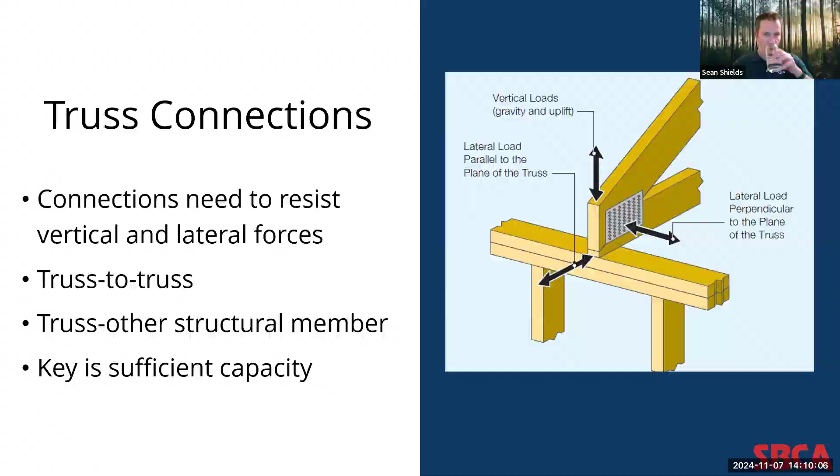Now, regardless of the connection type used, they must be reviewed and approved by the appropriate party to ensure that they have sufficient capacity to transfer the required loads. And this is because the type and magnitude of the load being resisted will be influenced by several things, including the location of the connection point in the structure, certain framing conditions, and the type of environmental loads that will be placed on the structure over the life of the building itself.

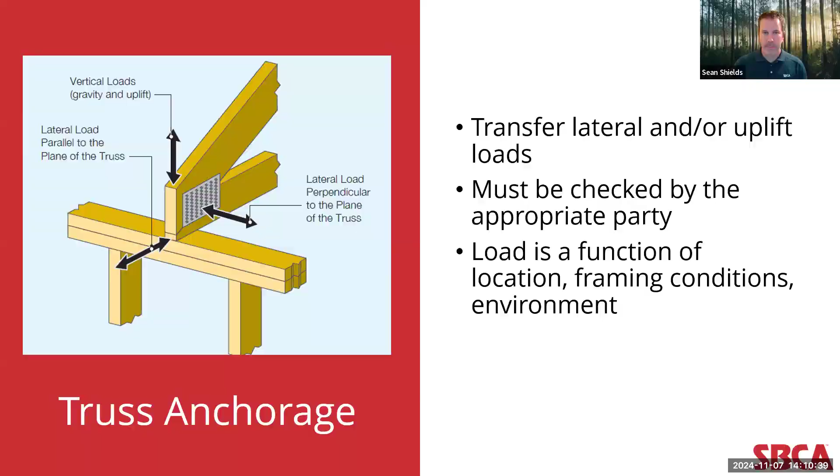So let's quickly go over some of the loading conditions that we covered in part 1 that impact truss design, and also the design of the truss connections. So whether it's a truss anchorage point or a truss-to-truss connection, these different loading conditions help determine proper connections. So vertical forces on the roof system are resisted by the roof trusses. That's then transferred to bearing locations, which are resolved then within the structure itself.

Again, following established scopes of work when it comes to determining or reviewing truss anchorage and/or truss-to-truss connections is pretty important, because the truss designer is really only responsible for designing individual trusses, independent of the roof system or other structural systems in play. And I'll repeat that. Again, one way to think about it is the truss designer is really designing a 2D element within the 3D structure. They're designing a single element and designing it to resist the loads that have been identified by the building designer.

And I keep on using the word building designer, and depending on whether or not you are in a building that's governed by the International Building Code, which does require a registered design professional to be the building designer, and we'll talk a little bit more about that in a bit under scopes of work, or you're under the International Residential Code, where that building designer may or may not be well defined. It may be just the building owner or someone that the building owner has contracted to review construction documents and prepare them.

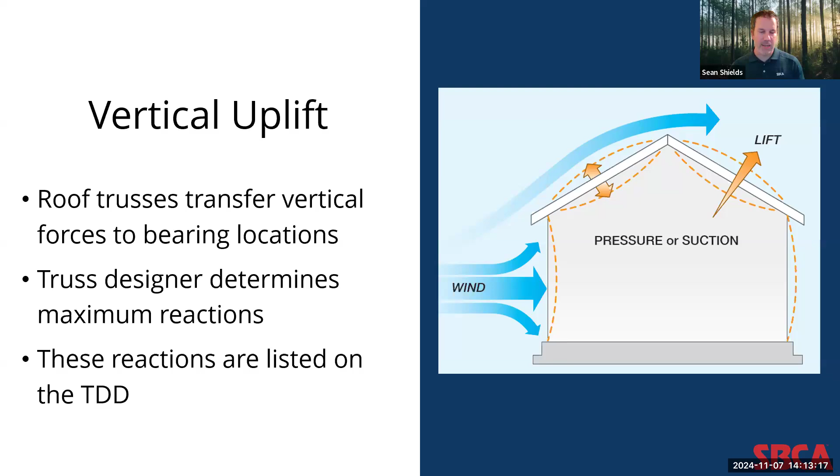The truss designer will take the information provided in the construction documents. They'll analyze the multiple load combinations provided in the construction documents, and then determine the maximum reactions at the support locations from the loads applied to an individual truss. Now, these maximum reactions are then provided in the individual truss design drawings. And again, the building designer or building owner needs to review them to ensure they don't exceed expected load conditions. So we'll revisit that concept a couple of different times in a couple of different ways.

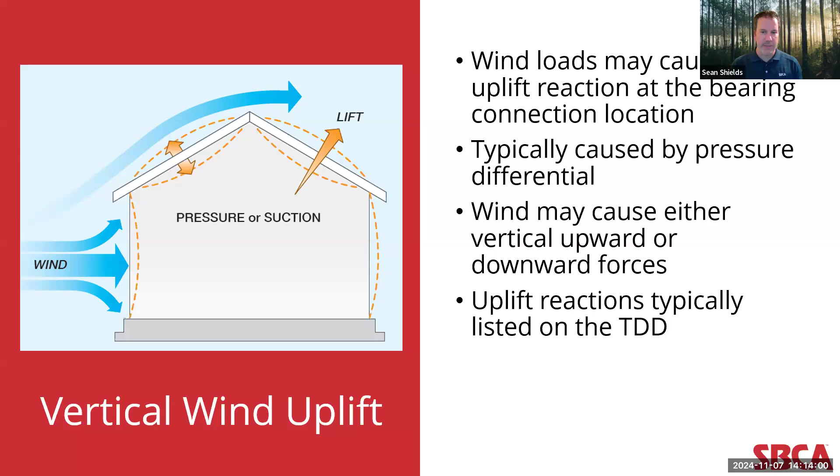So let's look at two load examples, wind and gravity. Now, depending on the roof shape, the span, configuration, wind loads applied to a roof structure may cause an uplift reaction at the truss-bearing connection locations. Now, this is caused typically by pressure differential created when wind blows over a structure. As you can see in the figure on the left, wind loads applied to a structure result in either upward or downward vertical forces. Again, the magnitude of these uplift reactions will typically be provided on the truss design drawings and need to be reviewed by the building designer or designated person by the building owner.

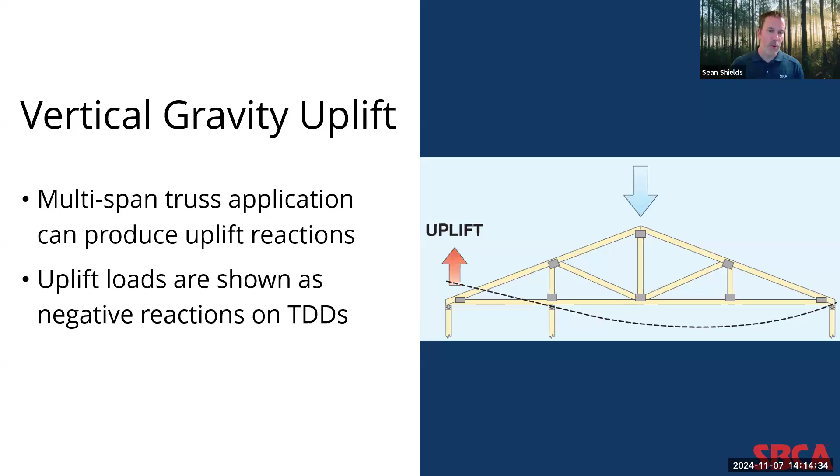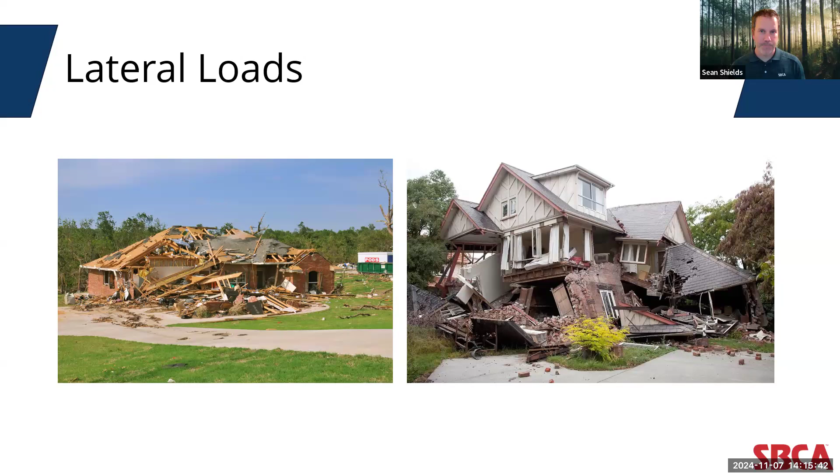Given all this, a complete understanding and analysis of all the code required loads applied is vitally important, and again, a responsibility of the building designer or the building owner. The magnitude and location of lateral loads applied to a structure are dependent on many variables, including the location of braced wall lines, wall heights, anything like that. Again, the truss designer is only responsible for the design of the individual trusses and applying the loads specified in the construction documents. Otherwise, if a piece of information is missing, they have to start submitting a bunch of requests for information. And depending on how well those are replied to, it can really slow down the process or increase the cost of the design.

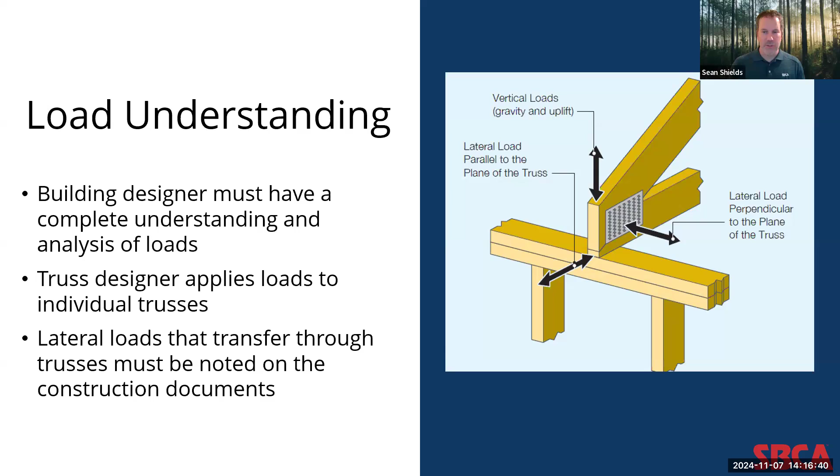Any lateral loads that are applied to the side of the structure or elsewhere that transfer through individual truss members need to be noted in the construction documents so that the truss designer includes them in their analysis. So how does this impact truss-to-truss connections? In light frame construction, it's common to design and integrate a girder truss, for example, which is a carrying member to support other trusses or groups of trusses. Truss-to-truss or truss-to-girder truss connections are under the scope of work of the truss designer. Per the ANSI TPI 1 standard, connection information must be included on the truss design drawings for any truss-to-truss connections.

For those of you who might not be familiar, the ANSI TPI 1 standard is sort of the governing standard for the component manufacturing industry. The TPI stands for the Truss Plate Institute. The TPI 1 was first issued in 1961 and is updated on a pretty regular basis through a consensus ANSI standard-based revision process. And TPI 1 includes a lot of information that governs both how the metal plates are manufactured and designed, but also how components are manufactured in a facility to how quality control is conducted. And again, that TPI 1 standard requires certain information to be included on the truss design drawings, including truss-to-truss connections.

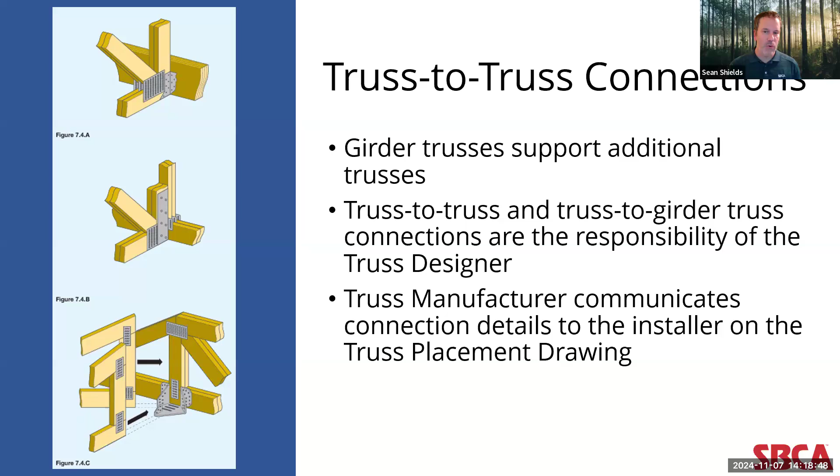It's important to note that most of today's truss design software has the capability to analyze and identify the hanger or other connection that would be sufficient to transfer the gravity or uplift reaction loads that are calculated from the supported truss to the girder truss. So again, the truss designer is responsible for providing that information, and a lot of times they're going to be using their design software to calculate what those reaction loads are, and then specifying the particular hanger or connection needed to handle those reaction loads. When the truss manufacturer uses this capability in their software, typically the required hanger or connection device will be specified on the truss design drawing for either the supported truss or the girder truss.

Examples of some of the manufactured metal hangers used in these applications are shown here on the left. And while truss-to-truss and truss-to-girder connections are listed on individual truss design drawings, many times it can be easy for this critical information to be overlooked or misunderstood by installers. To overcome that, often this connection information, including manufactured metal hanger callouts, is also included on the truss placement drawing itself, which is one of those primary documents that installers are usually holding on to see where individual truss elements are placed. We'll talk a little bit more about the truss placement drawing in a couple of minutes, because even though this important building design information is included on it, there are sometimes some misunderstandings of what the truss placement drawing is. But again, we'll get into that in just a few minutes.

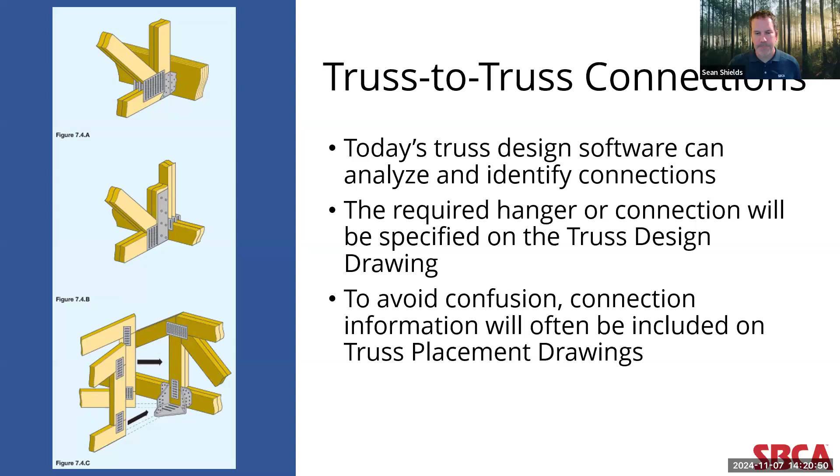Typically, toe nailing is sufficient. And that's because these are typically very short spans and have very light end reactions associated with them. Truss applications make toe nailing an efficient and effective attachment method in most cases. When the installer is toe nailing, those connections typically adhere to prescriptive tables provided by the code or other design documentation.

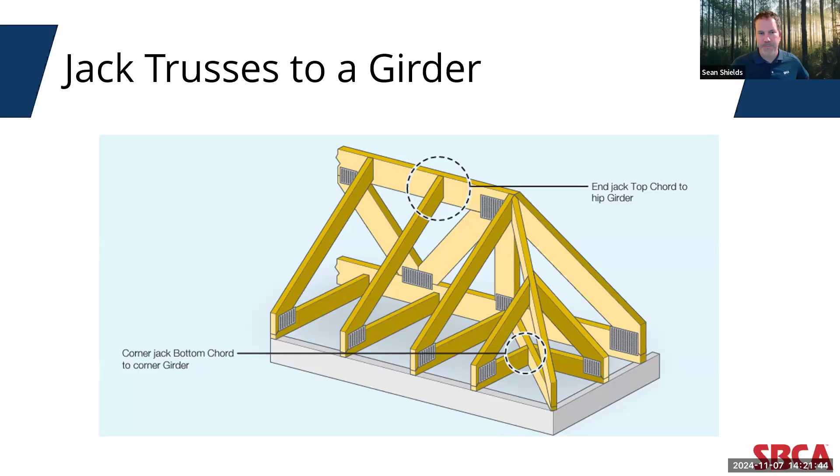Now, multi-ply trusses are another kind of truss-to-truss connection that we have to worry about. Multi-ply trusses are trusses designed to be installed as an assembly of two or more individual trusses that are fastened together and then act as one truss. The plies of a multi-ply truss must be properly connected, obviously, then, to ensure that they perform as the truss designer intends.

Fasteners for multi-ply trusses typically are specified for attaching together the individual plies of multi-ply trusses, and that can include nails, bolts, and other approved fasteners. And it all just sort of depends on the amount of load and number of plies involved in the multi-ply truss. Fastener specifications, as well as the location and spacing of those fasteners, will be listed on individual truss design drawings. Again, that will be determined by the truss designer.

And that information, again, typically will remain on the individual truss design drawings. That's typically not something that's going to be called out on the truss placement drawing like some of the other things.

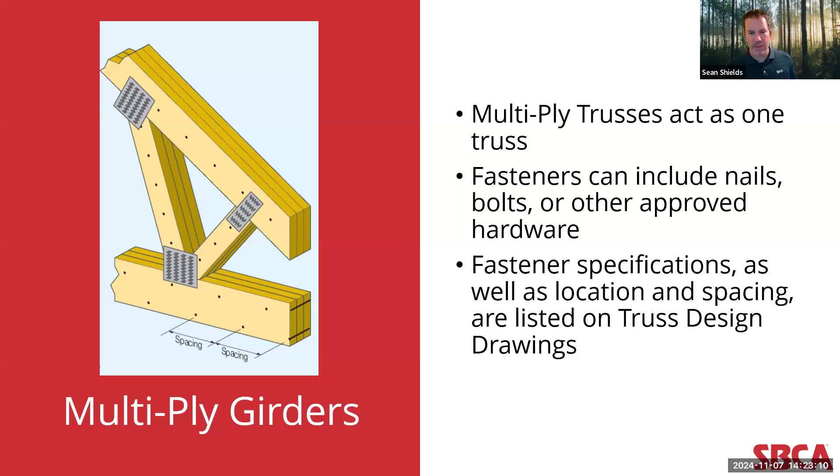The truss-to-truss connections between single plies of a multi-ply truss are incredibly important then, mostly to resist the forces that we discussed earlier that transfer through the roof system. The more plies that are in that multi-ply truss, the more load that system's going to be carrying, and so the more important it is for those connections to not only be adequate, but to be applied correctly.

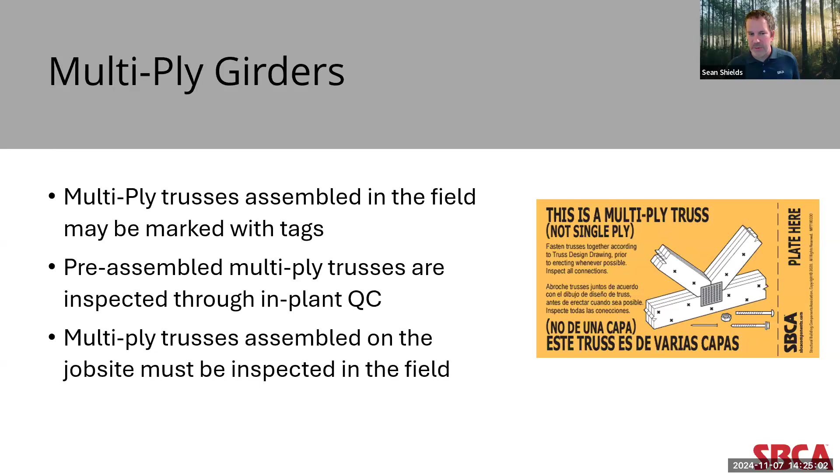But if they aren't pre-assembled, those multi-ply trusses are fastened in the field, and those fastened by nails, screws and that kind of thing must have all the heads visible. They must remain visible so that they can have field inspection. In a lot of cases, you'll have some failed inspections because one face of the multi-ply girder will be hidden behind some other framing element, and the field inspection isn't able to verify that all of the fasteners are applied in the proper number and spacing, and that can create some problems in the field.

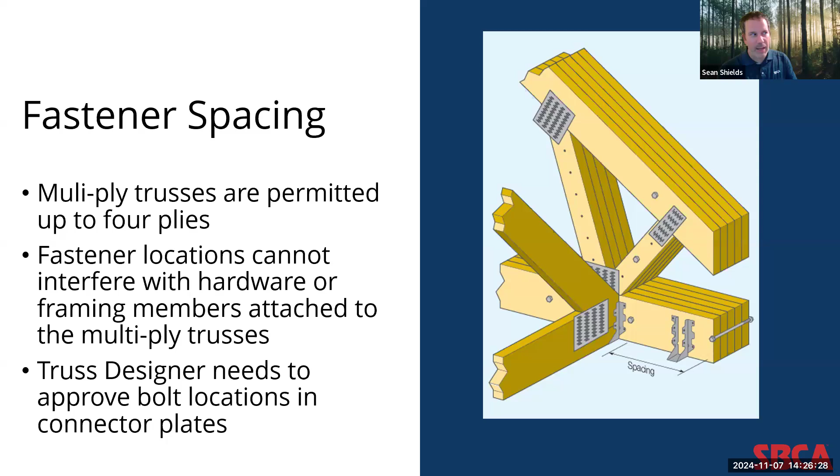While it's acceptable to locate screws and nails through metal connector plates, typically that doesn't interfere with the performance of the connector plate. Truss designers do need to analyze if there's a desire to locate bolts through connector plates for whatever reason. Again, sometimes spacing and or the location of connection hardware and the connecting trusses may make that kind of analysis necessary. But again, the truss designer will need to conduct that analysis before specifying that kind of location.

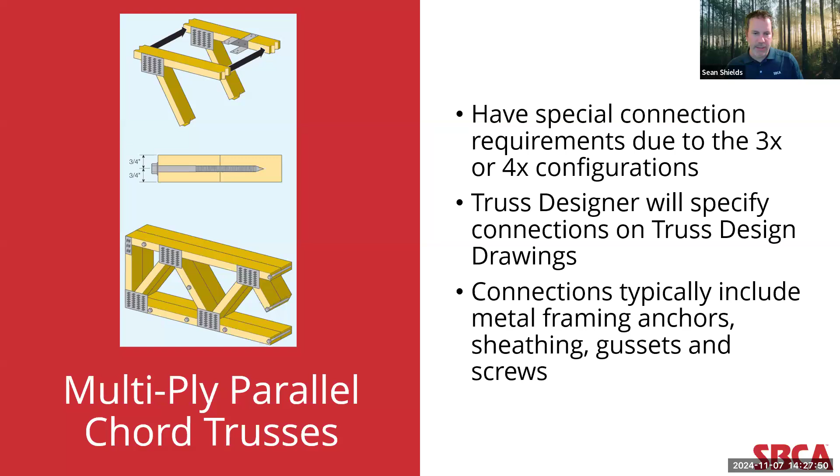So those are the truss connection, truss anchorage, and truss-to-truss connection details. Again, one of the big parts of this and why this education series is necessary and important is that this isn't always done correctly in the field or in the design process. And a big part of that is adhering to established scopes of work.

So I'm going to spend the next few minutes talking about scopes of work and defining a few of the terms that I've been throwing around during this presentation. So we're talking about who provides what information and where. So for the building designer, under the IRC, as I said, the building designer is a registered design professional. Again, they're responsible for the design of the building structural system.

And unlike the truss designer who's looking at the 2D individual truss element, the building designer has to understand how the vertical and lateral loads are being resolved throughout the entire system. The building designer is responsible for preparing all the construction documents. And within those construction documents, it has to include required spans, loading information for the truss manufacturer and the truss designer to use when they're preparing individual truss designs. So that's really important.

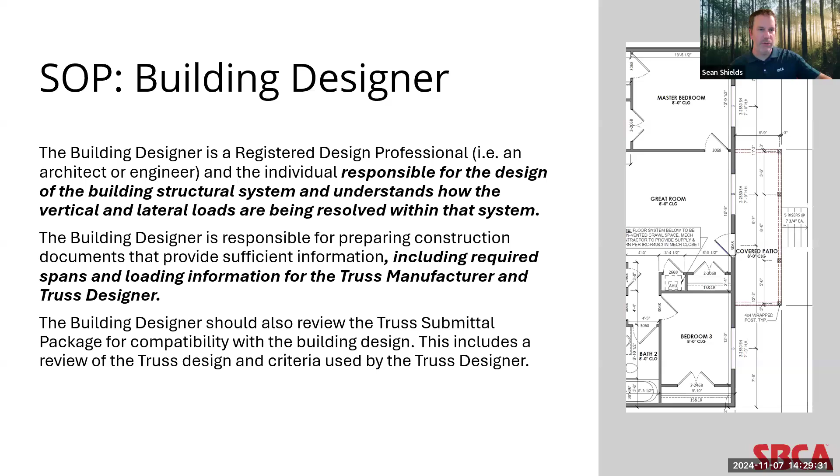I think many of you who are on this call have probably experienced that it's not always the case that you're getting all the information you need from the building designer in order to design individual trusses. And so, when talking to the building design community, this is going to be a very big focus: what is the scope of work of the building designer as opposed to the truss designer or the truss manufacturer.

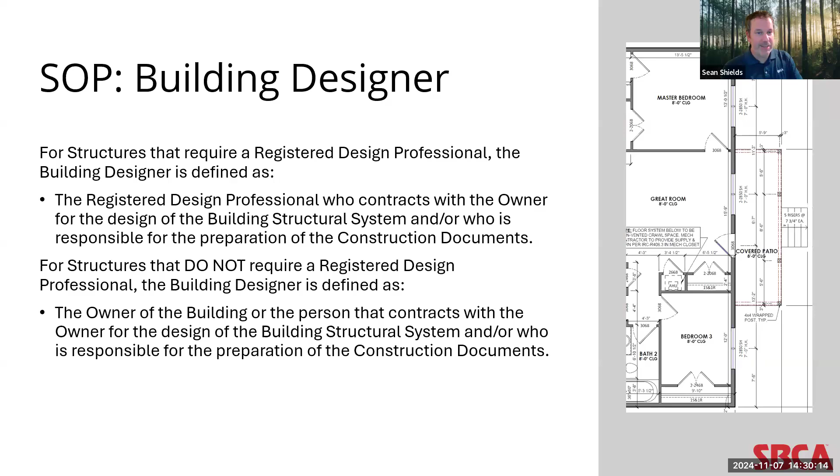And I alluded to this before, for structures that require a registered design professional, again, the IRC, the building designer is someone who contracts with the owner for the design of the building structural system and is responsible for preparation of the construction documents. When a registered design professional is not required, typically under the IRC, the building designer is, again, the owner of the building or the entity that's contracted by the building owner to design the building structural system. This is not the truss designer, and it is not the truss manufacturer.

So who's the truss manufacturer? The truss manufacturer is the entity responsible for reviewing the contract documents, and they're going to provide design parameters to the truss designer. Design parameters is an interesting one. Design parameters varies widely based on a lot of different factors. Sometimes the design parameters are local code requirements or amendments to the model code that they're incorporating into typically their design software.

They may also include limitations such as the raw materials that they decide to use, whether it's species, grade, and sizes of lumber that they decide to stock or can get in their region of the country. It may be the sizes of the metal connector plates that they use or prefer to use and have in stock. Those kind of parameters will typically be input into the design software. Sometimes those design parameters are also impacted by the physical manufacturer, the fabrication equipment that they own, that might limit the length or the height of the components that they can design and manufacture.

What I find really fascinating, I mentioned in the beginning, I've been working for SBCA for a little over 20 years, and I've spoken to probably 1,000 component manufacturers over that time. And while every component manufacturer in this industry essentially produces the same product, no two component manufacturers really do it the same way. And again, this has a lot to do with local building practices, land and building constraints, capital investments, labor challenges that they face. Also just how the individuals who run or own those companies think is the best way to go about making trusses.

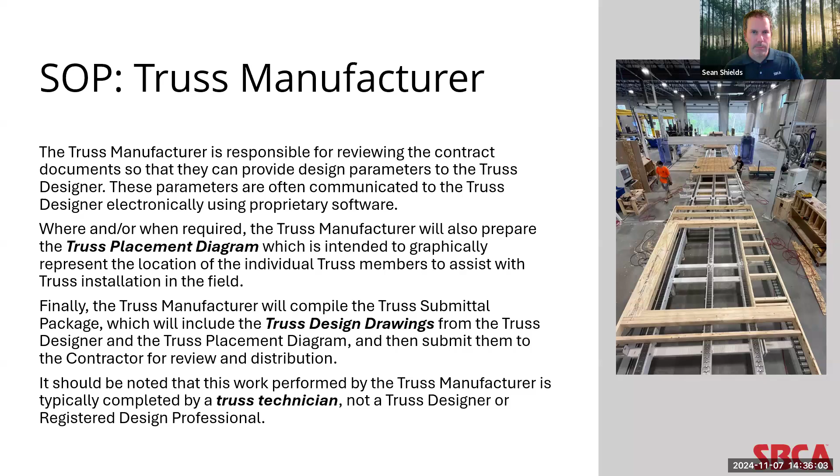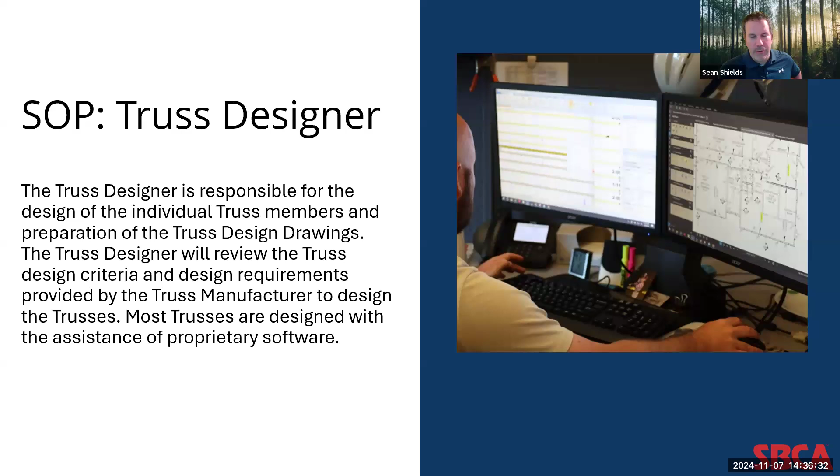So the truss designer, again, the truss designer, not the truss technician, is responsible for the design of the individual truss members, preparing the truss design drawings. And again, it's really important for the building designer or the building owner or whoever they've contracted to do a thorough review of each of those truss design drawings to make sure that, again, all of the load conditions are as expected.

So the truss manufacturer then puts together the truss submittal package. Again, they'll include the truss placement diagram. We've been calling it a drawing as well throughout this presentation. BCSI has a tendency of calling it a drawing versus a diagram, but I think in vernacular we call it the diagram as well.

What's important to talk about here with the truss submittal is that several jurisdictions in the US have really pushed towards requiring truss placement diagrams to be sealed, treating them as engineering documents. And this is a fight that SBCA has been waging on behalf of component manufacturers and alongside component manufacturers for probably 30 years. The jurisdictions are trying to limit their exposure to risk and review by requiring this truss placement diagram to be sealed by an engineer, passing that review process off to, again, a different party. And that's, again, outside of the established scopes of work.

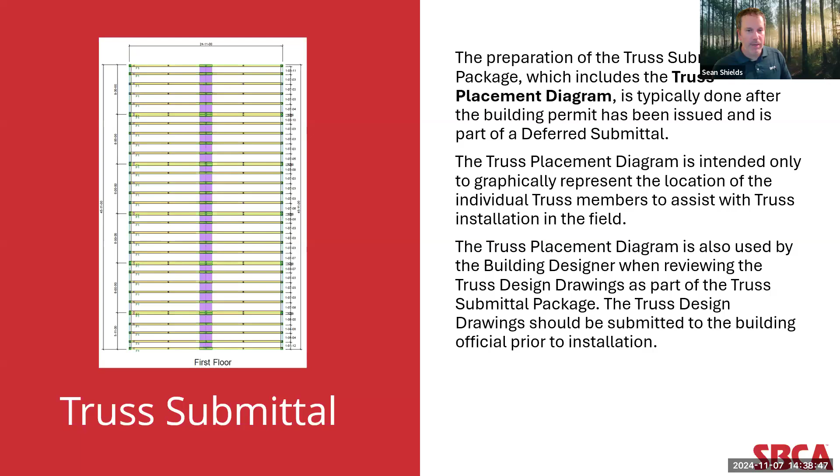The truss manufacturer reviews the contract documents and provides the design criteria and requirements to the truss designer. Again, sometimes there's requests for information that are involved in that process. Sometimes they're deciding what limitations they want to place within the design criteria, whether it's limitations on the material that's going to be used, the size of the plates, or the grade and species of the lumber, whatever it is.

Then the truss designer does their work, designing the individual trusses and preparing the truss design drawings using the specifications provided through the truss manufacturer. They then return those documents, the engineered drawings and manufacturing specifications, to the truss manufacturer. They go through that process. And again, the design software plays a very pivotal role in that process.

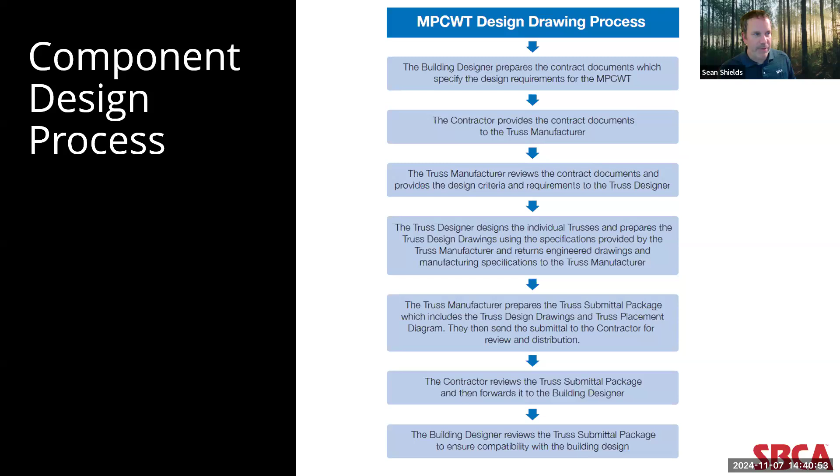So what I want to spend the next few minutes talking about is really why the building design community should care about this. And frankly, it's because while it's likely that the building code won't change significantly when it comes to how trusses are incorporated into buildings and what the requirements are, the capacity and capability of today's truss manufacturer is changing very rapidly. There's been a significant amount of investment into component manufacturing just over the last 3 to 5 years. And it's important for building designers to understand what component manufacturers can do today and why it's important to be knowledgeable about what our industry can do.

So again, I said there's been a lot of investment over the last 3 to 5 years. Why has there been that investment? Well, offsite construction didn't become a sexy jargon term overnight. I'll tell you, after attending the International Builders Show, which the National Association of Home Builders puts on every year, for the last 10 or 12 years, it's been very interesting to watch how home builders have decided to recover coming out of the last significant downturn that probably ended around 2012, 12 years ago. In those initial years, the home builders really just wanted to throw bodies at the problem. They want to build more, they're just going to hire more field workers to put these buildings together.

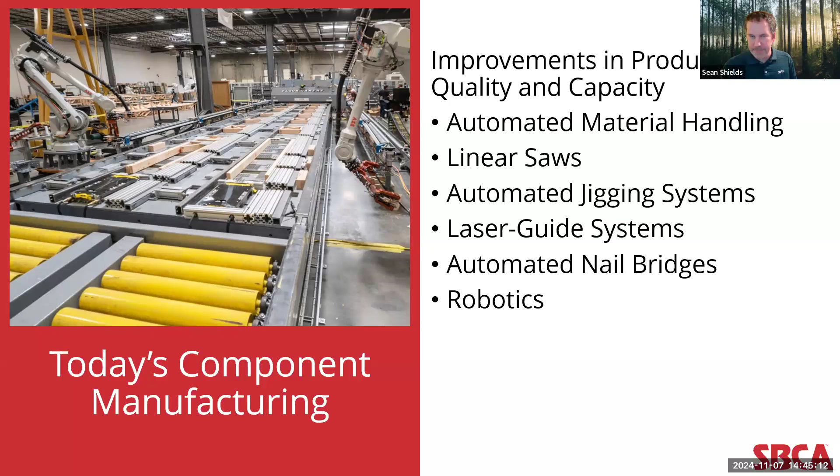Again, the driving factor that builders are facing is they don't have enough field labor, and even the field labor that they do find lacks the training and skill that previous generations had. They certainly don't have the experience. And you couple that with this growing environment of liability and enforcement, and it all creates an environment where the builder is looking for any and all opportunities to move production of structural framing offsite.

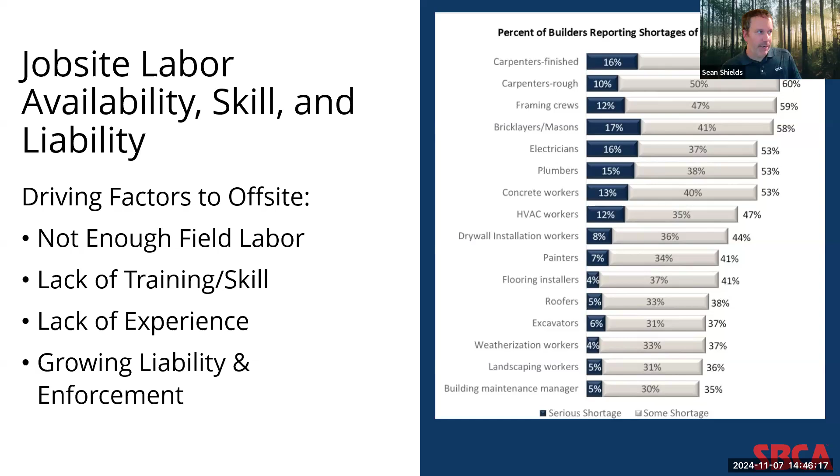So, one of the reasons why builders have shifted to structural components and stayed there is because it's really allowed them to do some of the things that they've always really wanted to do, which is better control their costs. It's helped them to reduce their construction schedules. It provides a solution that is less disruptive than some of the other things that they're looking at, whether it's 3D printing or modular or CLT.

They can really work within their established construction models when using these components. And finally, and probably one of the most important things, is that field labor is such a premium for builders these days. And so things like roof trusses, wall panels, and floor trusses produced by the component manufacturing industry are some of the easiest elements for field labor to incorporate today.

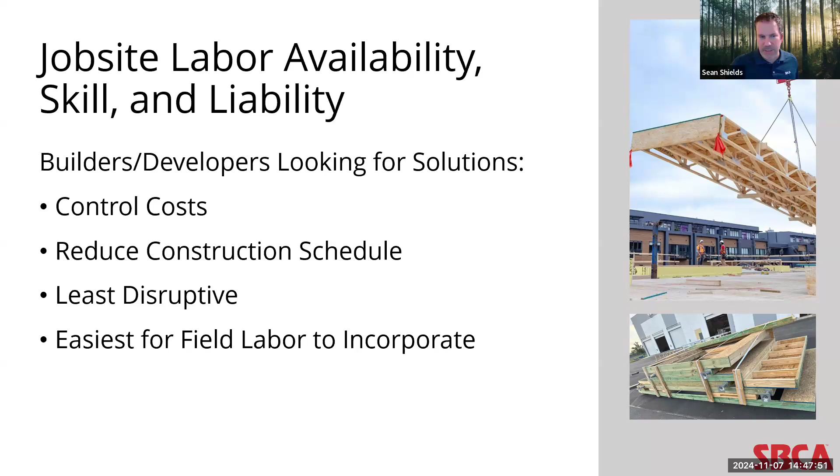And so, for building designers, when they're looking at ways to be a hero to their customers, looking at more ways to utilize these structural elements can help them really be successful in the eyes of their clients. Beyond that too, we've done a lot of framing studies, which we've in the past called Framing the American Dream. We actually just concluded one in Austin, Texas, within the last few months.

And what we've found is that, with these structural elements produced by our industry, it really allows someone to complete a framing project using less material, using fewer bearing locations, because they can have longer spans. It allows them to source those components many times much easier than some of the engineered wood products that are out there, or certainly any of the other framing options, whether it's CLT or modular, and they're easier to erect. All of these things lead to lower overall costs and reduced cycle times.

So again, I list them all because this is the feedback that our industry is getting from their customers, building owners. And so it's important to feed that back to the building designers, that there's a real opportunity here for them to partner with component manufacturers and specify more of these products to reap some of these benefits listed on the screen.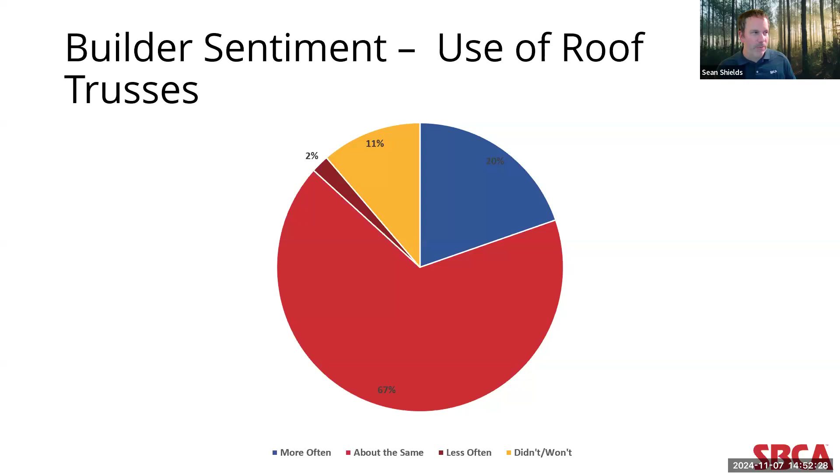But again, component manufacturers produce more than just these roof trusses. They make wall panels and floor trusses, and there's significant opportunity for building designers to work with component manufacturers to incorporate these additional framing elements. You look at wood wall market share, for example, there's a lot of market share available.

I want to bring this presentation to a close by refocusing on the building designer and their community, and really finishing by talking about the design software that component manufacturers use to design the individual truss design drawings. There has been significant improvement in the manufacturing process, which we covered, but there's also been significant improvement in the proprietary design software.

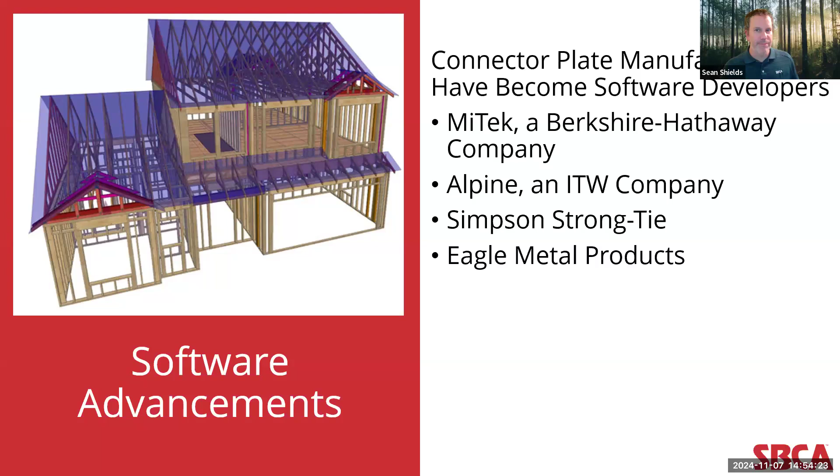That design software is produced by one of these four companies, MiTek, Alpine, Simpson Strong-Tie, or Eagle Metal Products. And these four companies are still, in our industry, identified as the provider of the metal connector plates. But increasingly, one could easily call them software developers as a primary business model. These four companies have made significant investments into integrating other software platforms to increase the power and capabilities of this design software in the hands of the component manufacturer.

So, they've incorporated everything from plan reading, building design, 3D modeling, and building information modeling, obviously component design, but also integration of fabrication equipment, and even integration of AI to aid in a lot of the repetitive aspects of plan reading and data entry. And all of these things, when you combine it with their expertise and their knowledge, can really make the component manufacturer a valuable partner to today's building designer.

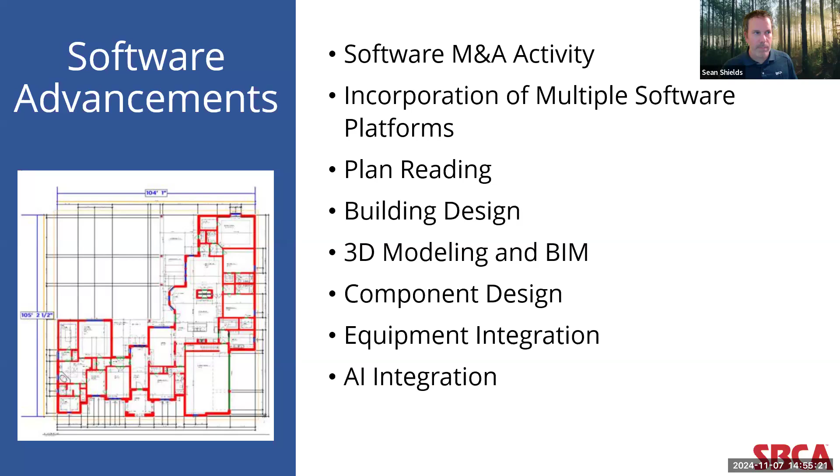So, in conclusion, again, truss connections are a vital aspect of the building design and its performance. And when we talk about scopes of work, the building designer is really required to provide adequate information to the truss designer so that the truss designer can adequately design each individual truss element.

Within that, truss-to-truss connections are going to be specified by the truss designer and placed on the truss design drawings. But each of those individual truss designs need to be reviewed again by the building designer or the building owner, to make sure that they adhere to what's expected for the building performance.

And hopefully what's very clear in this presentation is that the building designer has a lot of responsibility, but again has a very powerful and knowledgeable partner in this process. And the sooner that a building designer can bring a component manufacturer into the design process and utilize their expertise and their capabilities to figure out the most efficient, economical way to get a particular building design accomplished, the more successful they're going to be.

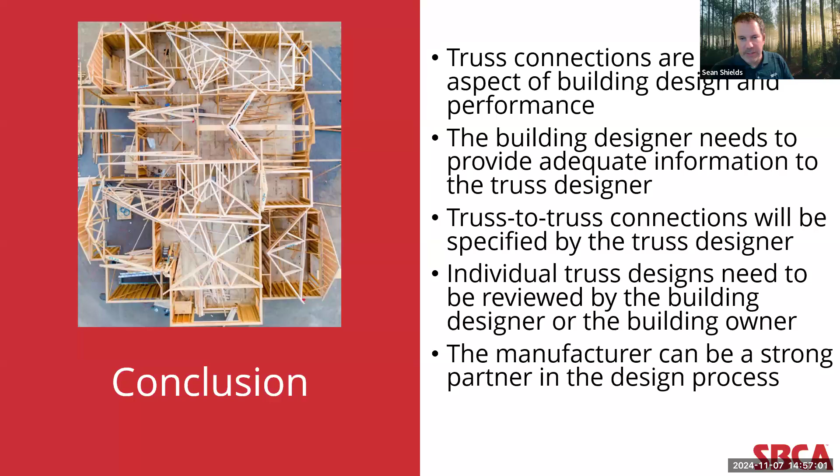They're going to save more money. They're going to be more efficient. And so that's what I hope is the main takeaway for the building designer as they think about the component manufacturing industry. So that's the conclusion of this presentation.